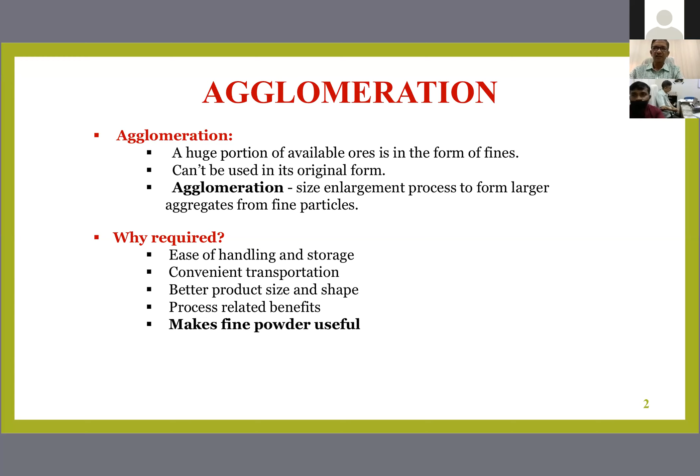There are two processes normally practiced, although there are many, like briquetting, which was the first among the agglomeration processes used, followed by nodulizing. These two processes slowly started going away from the scene because they cannot be manufactured on a much larger scale. As the volume of fines started increasing, the briquetting press or nodulizing units were not able to handle the capacities we were looking for.

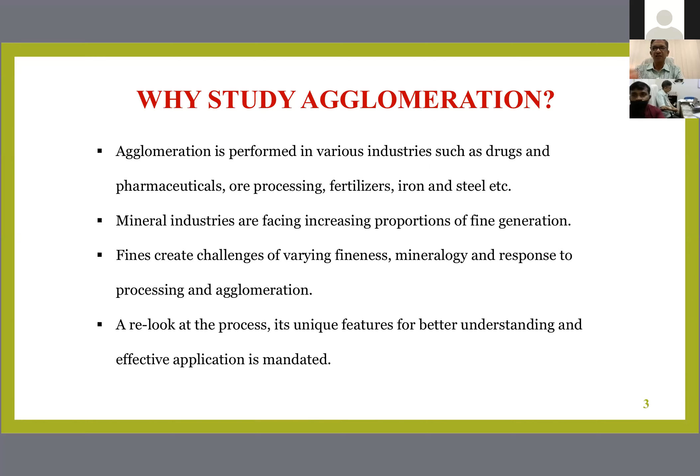So the two processes which at the moment are universally used across the globe are sintering and pelletization. Sintering is a process where you heat it to just below the fusion or melting temperature, and the incipient fusion on the surface of the particles binds them together, producing a sinter.

The difficulty or limitation of a sinter is that the shape is irregular. You need to break them at some point to send it to a blast furnace operation. The permeability that a sinter makes may not be completely conducive to the heat reactions that you need to undergo in the blast furnace.

Pelletization gives the advantage of producing relatively more regular shaped materials, pellets, which are more spherical and create very good porosity and permeability of the bed so that reactions are much better. But the blast furnace feed mix will have to be lump, sinter, and pellets. Earlier it was only lump and sinters; now a little part of pellets are also being used.

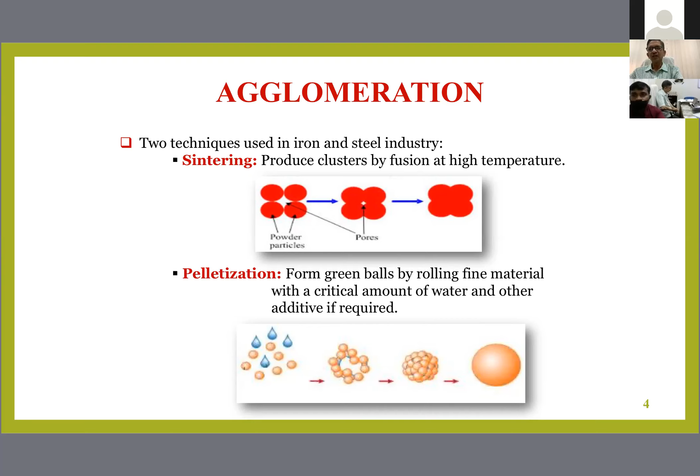In my opinion, with the kind of beneficiation processes and the ore that we are mining, the size of liberation will keep going down and down. Then there will be more and more requirement for pellets to be in the blast furnace feed mix.

Once we know that pelletization has already come to the fore and will be leading the next few decades, I have a personal feeling that the pellet proportion will increase, with lump and sinters relatively decreasing, making it maybe another 50% or something.

The pelletization process is carried out in two major events. One is to prepare a pellet which is wet and green, of some size and strength. Later on, you remove the moisture by preheating, then dry it, and then take it to induration before the pellet is ready for being fed to the blast furnace operation.

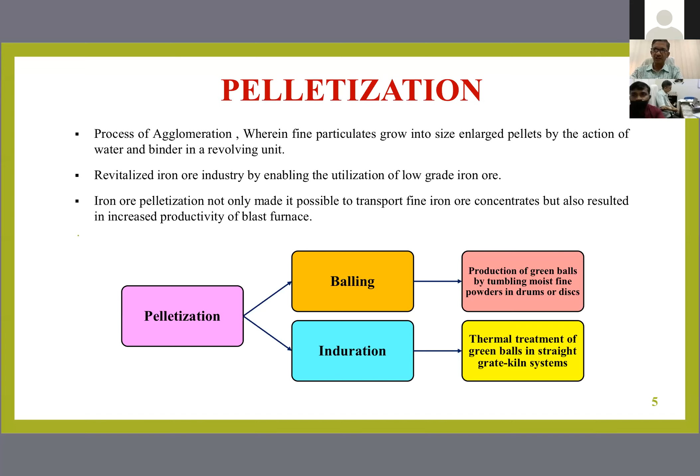So green pelletization is the first part, followed by preheating and drying, and then you move to the induration stage. The production of green balls of a particular size, range, and strength is of critical importance, because once your green pellets are of proper size and strength, that leads to a much better indurated pellet in the end. So if I do not have a good vocabulary, I will not be able to make a good sentence.

Taking the analogy, the green pellets are to be of sufficient size, range, and strength to be amenable for proper induration, and that should provide good blast furnace feed material of sufficient permeability, so that the blast furnace process efficiency is better. So the first and most crucial step is the green pelletization.

To all my young friends listening to me, when I started the research on green pelletization, which was my PhD topic in 1981, about four decades back, people were saying why pelletization? Because pelletization had been stopped due to higher cost of fuels in induration. So pelletization has no place, no future. Why have you taken a PhD topic of this nature?

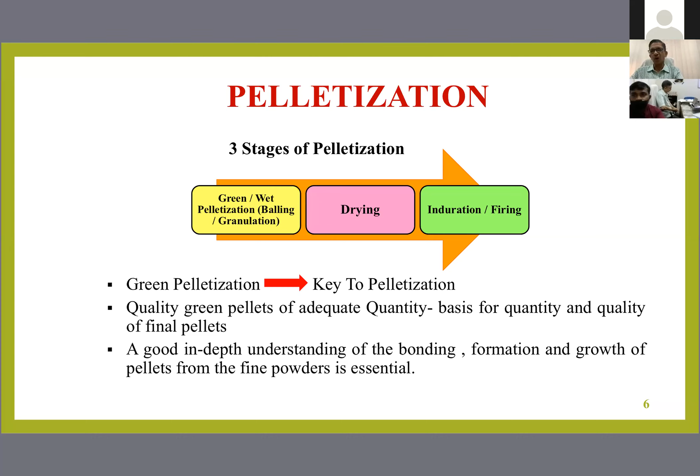So let us now take a fundamental look, which is what I tried to understand in the beginning when I started my career: why a pellet becomes a spherical particle, and how this process goes on before I get a pellet of a spherical shape.

Each and every particle, according to its surface area, will have its own surface energy, which could be electrostatic, magnetic, or dielectric properties, and they do have a tendency to attract each other. So that will be in a dry state.

But when I add a liquid, the particles and the liquid start interacting. Then as water is trapped between two particles and starts becoming thinner and thinner, the particles start becoming closer to each other. As the interfacial area between the two keeps coming down, the surface free energy that was there keeps reducing too. So the key driving force in the green pelletization process is the shrinking of the interfacial area, which brings the particles together, and then the mechanical action of the rotating device, disc or drum, gives it the final shape.

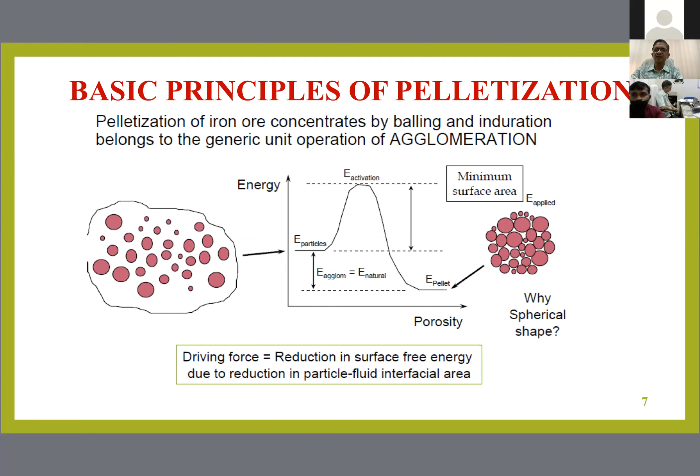So it is a very good individual microporous structure, and the pellet will totally have good permeability there, because a three-phase system is reduced into a two-phase system. And this is common knowledge.

Or it can be a pre-moistened material coming to a pelletizer. Then you add the requisite amount of water in a manner that it is equitably distributed, so that all the particles have a very good chance of taking the water molecules, and then increase themselves into a size which can be recovered from the disc pelletizer or the drum pelletizer.

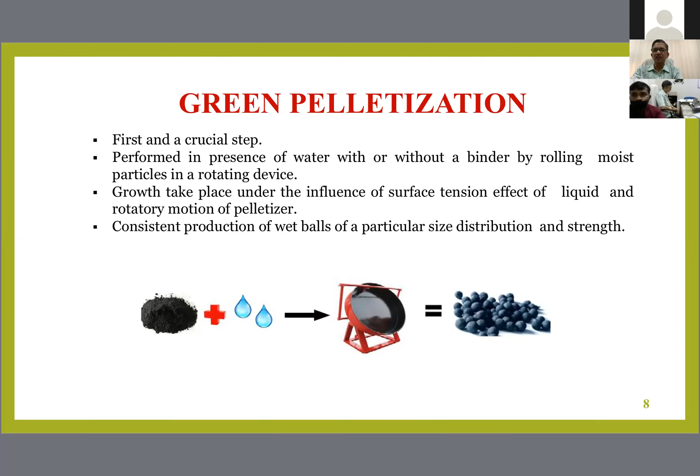So a consistent quantity of pellets of sufficient size range, that is 8 to 16 millimeters, is what is normally required, and of sufficient strength, both green compression strength and drop number, will lead to a good drying stage, followed by a good induration stage.

So I have just listed the natural forces that make the particles come together and enable size enlargement. The first is the van der Waals forces, the magnetic and electrical properties, mostly of relevance to a dry state.

Then the second is the interfacial and capillary forces due to the action of the liquid, the surface tension of the liquid, and how it binds the particles together. So that is the force which brings the particles together.

The third is adhesional or cohesional forces, that is an enabler or additive, that is binders, which give that particular force of bonding together, so that it can increase the strength of the pellet. Then there are solid bridges formed by interlocking. I'm not concentrating on that because it is very minor when it comes to the pellet, but in sintering, there will be some amount of interlocking effort.

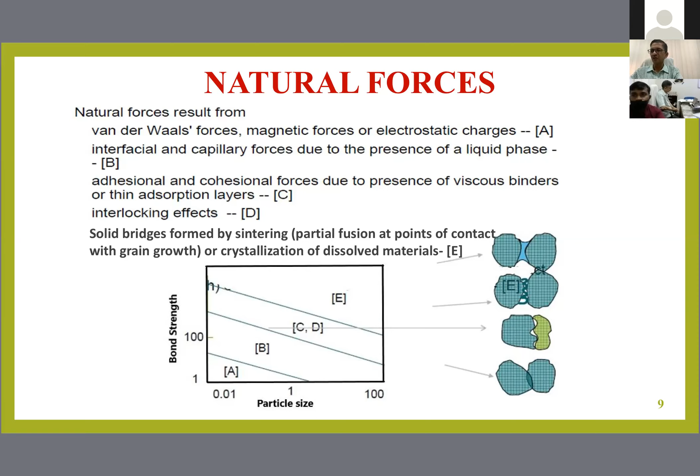So I would say B and C are the two major forces where the fine particulates become a green pellet. As I was trying to highlight, it is the interaction between the solid particles and water that really brings them together in the initial stages.

There's great contribution from researchers like Rumpf, Fisher, and Hains, where they tried to find out how the three-phase system - solid, water, and air - over a period of rolling or mixing, becomes a two-phase system. It goes through stages, like a pendular stage, where you have water in the form of droplets, more air pockets, and solids. The minimum amount of water holds the particles together, so the pendular bridges will be relatively weaker compared to the capillary state material.

Then when the mechanical force or applied force starts lengthening the water droplet, the droplet starts becoming a lens. As it elongates, moving through the interstitial spaces between particles, it slowly drives out the air from the system and occupies the vacuum created by the removal of air.

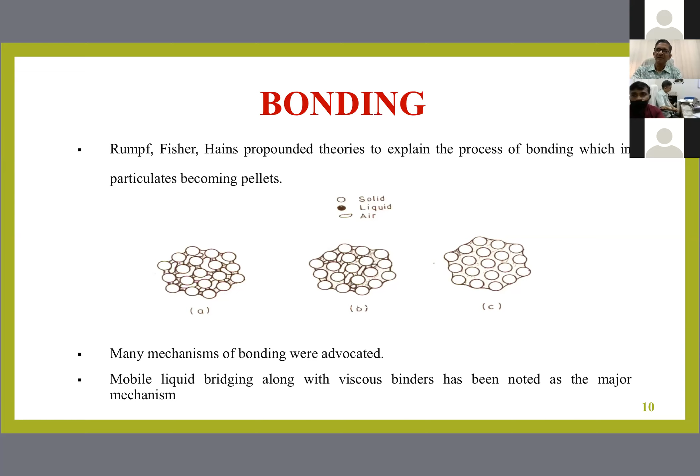This again is a force balancing phenomenon. The contribution of Hains is that he derived a function called suction potential - if there are two particles of particular surface energy, and liquid holds them together in the form of a droplet when we spray moisture, the dry particles attach to the droplets, the droplet becomes a lens, and the lens becomes elongated material flowing through the capillary pipe. The thinner the water becomes, the better the attachment between the particles.

So you see going out, that is the expulsion rate of the air, and once that expulsion rate is there, that will be the rate at which the water will become thinner and thinner. And the critical surfaces are under compression. So the negative effect of compression of the solid surface and the removal of water, exudation of water, and the air and water are the two combined forces which bring the particles together.

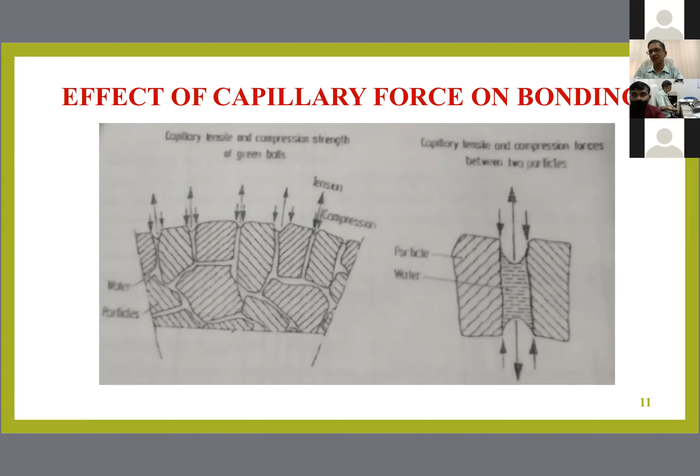So this particular graph or figure is what initially I had a lot of difficulty understanding. But once it was understood, the external forces can be manipulated in such a way that this phenomena takes place as early and as quickly as possible.

So this is again a pictorial representation of what I told already. In the beginning you look at two particles, then they start pointing together. Then the moisture that keeps coming to the surface keeps dragging more and more dry particles into it. As more and more particles are there, the water in the interstitial spaces starts moving out. Then finally we end up with all the pores filled with water, with a thickness of water on the surface. And then the nuclei has been arrived at.

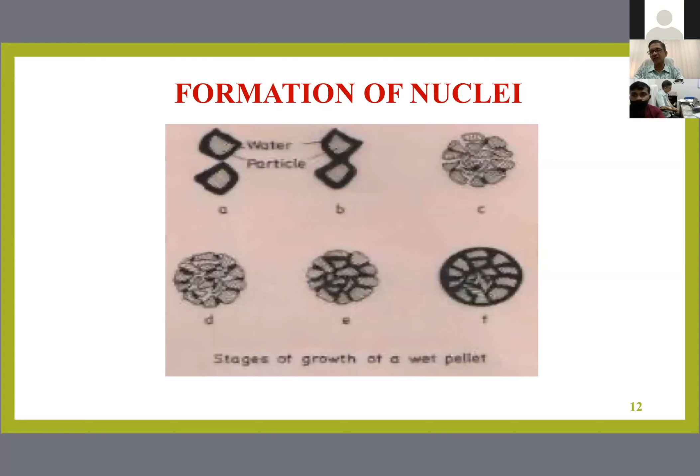So this nuclei formation - industrial practices should make it happen as quickly as possible. For that, you need to understand the size distribution of the material being treated, what quantity of moisture needs to be added, and more importantly, how and where this moisture is added in the pelletizer. That's what I'll come to when I start talking about the factors affecting pelletization.

Now, in summation, these are the major activities. You have nuclei formation, and then the nuclei start colliding with each other, and because of the surface moisture, they stick to each other. The number of nuclei keep sticking to each other, so that slightly increases in size, and the process of nuclei joining together to become a bigger entity is what we call coalescence - that means the coming together of moist fragments, or moist micropellets. So this activity is the first step in the growth process.

Then the mechanical forces - sometimes what is the binding force of the pellet, and what is the speed of the disc or drum, and what is the inclination. These two, disc and drum speed and inclination, will generate a torque, and if that is more than the binding force of the pellet, then the pellet is likely to break when it hits the rim of the pelletizer. So there is a lot of material which may form into a coalesced material and break, and then the broken fragments again stick onto the surviving smaller entities.

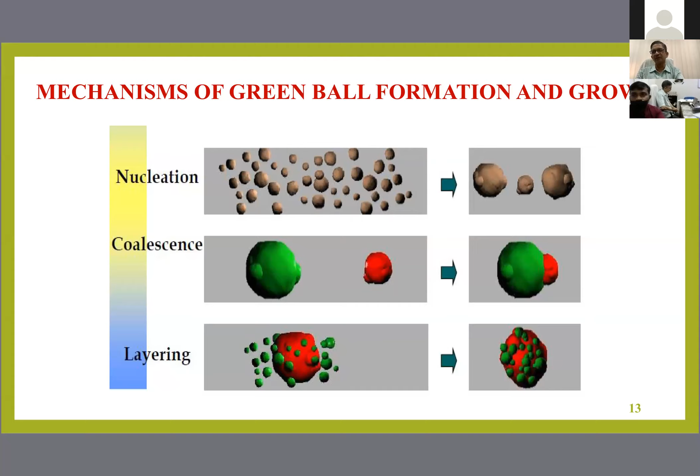This is a macro imaging of the process, and there are a lot of micro events that take place before the final layered pellets, which is above 8 or 9 millimeter and can go out of the pelletizer, start arriving.

This particular graph, in 1964, when Professor P.C. Kapur of IIT Kanpur, at the University of Berkeley, started doing PhD on pelletization, came out with this landmark graph. Why I am saying it is landmark is because this is the fundamental understanding of a pelletization process, especially the balling process, that one has to understand.

Then if these regions are manipulated - he has taken the number of drum revolutions on the x-axis and then the average pellet diameter - so as I was trying to say, the nuclei growth region has to be as small as possible, and the transition zone relatively greater, but the ball growth region has to be much more.

So the sooner we arrive at that ball growth region, that means the pellets have to increase from somewhere around 6, 7, 8 millimeter to 10, 12 millimeter and beyond. So the sooner we reach almost all the material at a pellet size of 7, 8 millimeter, that is what we call the ball growth region.

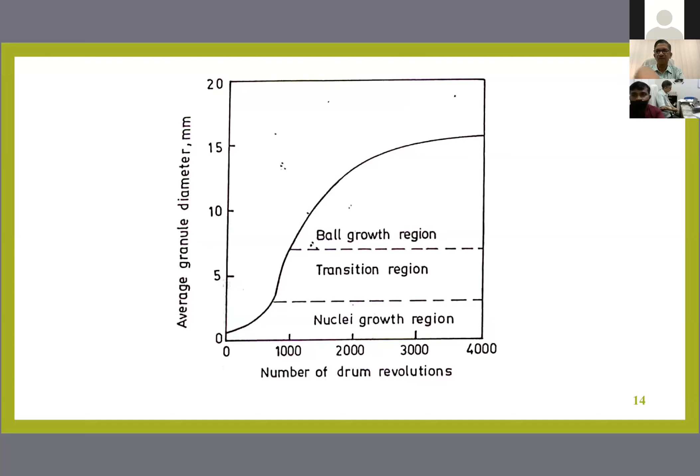Now Capes is another scientist who contributed significantly - two people, Capes and Danckwerts. They were the ones who initially started modeling along with Professor P.C. Kapur, and started giving a quantitative analysis of the processes of nucleation, coalescence, crushing and layering when it comes to batch, and also layering when it comes to a continuous process.

But in my opinion, the modeling of the nuclei was included as part of the coalescence modeling, which I later on understood when I started studying pelletization. I think a good quantitative understanding of the nucleation process is key - if I have to get more pellets in less time, the production rate has to be increased. But Capes gave us three mechanisms.

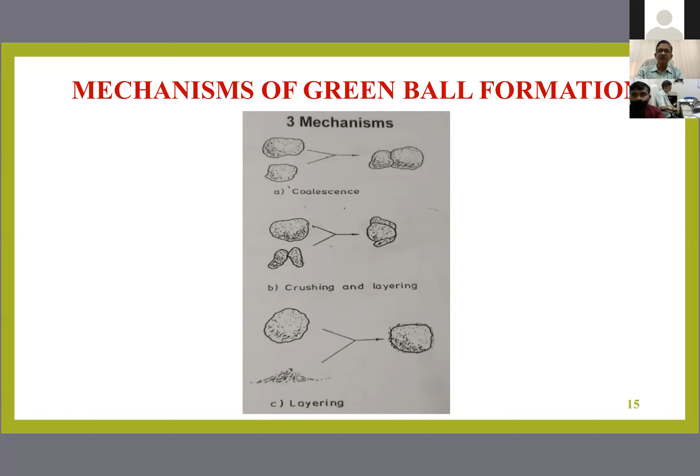One is to form nuclei, and they combine together. Second is coalescence, crushing, layering, and finally the fine powder layers onto that - which Professor Sastry later on, when trying to use mathematical modeling of the green pelletization process, used the population balance methodology, where he said yes, the nuclei coming is the birth, then the nuclei mix and interact together to become a coalesced pellet.

That again is a birth. And a coalesced pellet at some point of time breaks, so that is a death. So the population keeps changing as a function of time, as a function of drum revolutions or disk revolutions. And then he started breaking down the events into micro events - nucleation, attaching together, crushing, breaking, then abrasion, accretion, abrasion transfer.

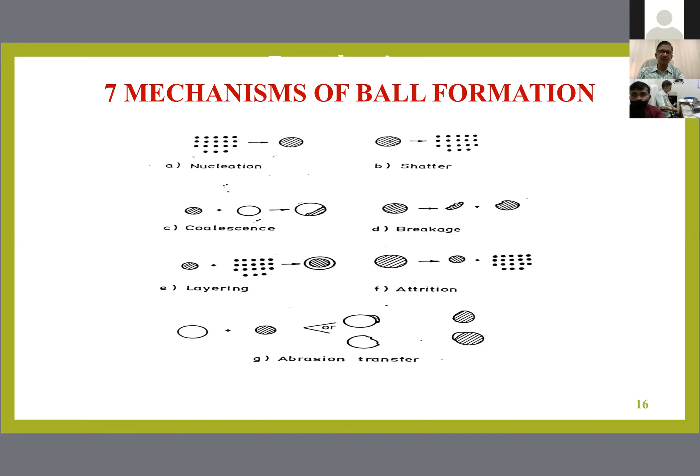Once we want to mathematically express this, we can assume a number of events and give a pictorial representation of a mathematical expression. But to be succinct, it is always better to have only three processes when you do a batch green pelletization in the laboratory or initial testing at the pilot scale. When we go to the continuous process, we have a fourth process of layering or snowballing. We will come to that.

So the rate between these 4 mechanisms are the ones that we need to reduce. And for that, we need to understand the material parameters, the machine parameters, and handle both judiciously to give a final pellet of a desired quality.

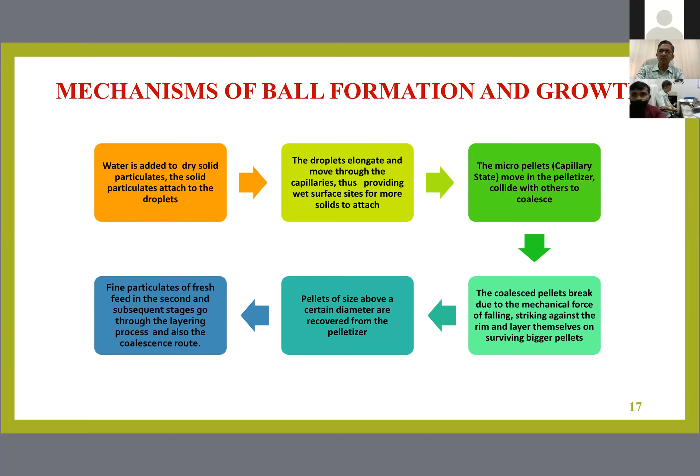So these 6 stages of ball formation and growth are what one has to understand with respect to the material I am going to pelletize, the kind of binder I am going to use, the water quantity and how I add it to the pelletizer, and how much binder I use. All these factors contribute to an early formation and healthy growth of the pellet in a short duration of time. This whole activity needs to be done with understanding of these factors which contribute to a pellet of a particular size distribution and strength.

You can see at the bottom and at the top, these two are the critical parameters - the initial feed size distribution is the starting point of pelletization, and the moisture that I add is a function of the size distribution of the feed I'm going to use. So the interaction between the quantity of water I add versus the size distribution of the feed material - these two create the nuclei and the capillary state pellet. The binder is an additive that supports the process of nuclei formation, because pellets made out of only water and solid particles are not strong enough to withstand the fall or impact. So binders are essentially added.

If I don't need to add a binder, I'll be more happy. So people are also trying to find out whether the feed material itself can be impregnated with a material which has inherent binding property, then I don't have to add any binder externally. These are all in the laboratory investigation stage, so when it will reach commercial stage we don't know. But if your feed material has a material with inherent binding property, you need to be very careful about the quantity of moisture that we add.

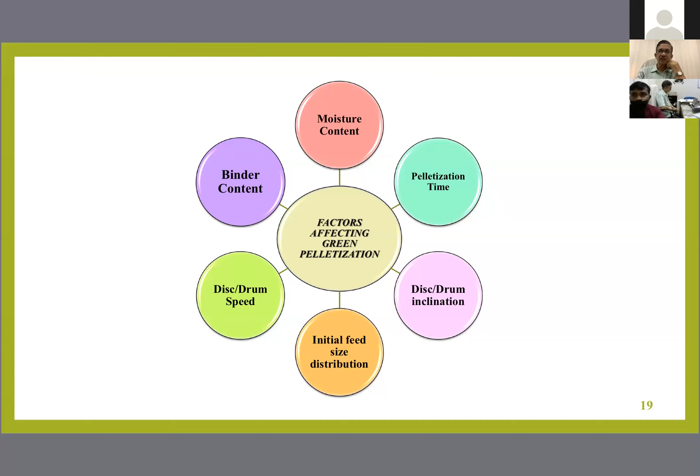So these can be controlled by speed and time. Speed, inclination, and time are the enablers - they give you a pellet of a particular size distribution and strength. And the prime movers for the pelletization, that is the green pellet production of both capacity and quality, will be the feed size distribution, moisture, and binder. If we understand these things, we can give the industry the result they require.

So these are all, again, what I have said. The pellet quality and quantity we find out in terms of size distribution, as a function of the average size distribution - because we can represent size distributions as coarse and narrow, coarse and wide, fine narrow, and fine wide. In a pelletization operation, we require a relatively coarser size but a wider size distribution. So the average size of the distribution tells me whether I have reached the pellet size distribution I'm trying to get out of the pelletizer.

Then when I screen the material from a drum pelletizer, or collect the classified pellets from a disc pelletizer, that tells me the weight proportion of material above a particular minimum size, like 8 or 9 millimeters. In my studies, I had taken 9 millimeters as the threshold limit - so what is the percentage of material above 9 millimeters?

Then we try to find the strength, both at industrial scale - the weighted mean drop number and the compression strength - so that when it is transported or falls from a given height, it doesn't crumble. When more pellets travel on a conveyor belt, the pellets above apply pressure loading, and that should not make the particles below crumble. The pellets at the bottom should withstand the pressure exerted by the pellets on top during transport. So these are the four parameters of quality and quantity we normally need to estimate for a green pellet.

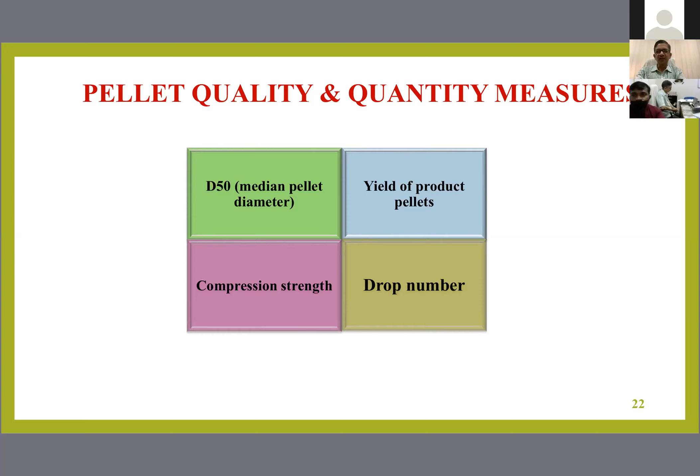Then how do we calculate the D50 average size? It could be a simple graph drawn of cumulative percent passing against the size. When I draw a line at 50% passing, the size of the material at that point means it is equally distributed, plus and minus. So that gives me the average size, and an idea about the coarseness or fineness of the material.

Why this D50 is important will come later, because in modeling, in most cases you can't take the entire size distribution into consideration. You need a representative size of the distribution which indicates whether your material is coarser or finer. So some people call it the median pellet diameter, which is D50.

Sometimes you can even take the 80% passing size as the representative material. That is what comes when you go for a blaine number. When you grind the material and take it for surface area measurement, whatever number comes, you take it as the blaine number, which gives an indication of the fineness or coarseness of the material.

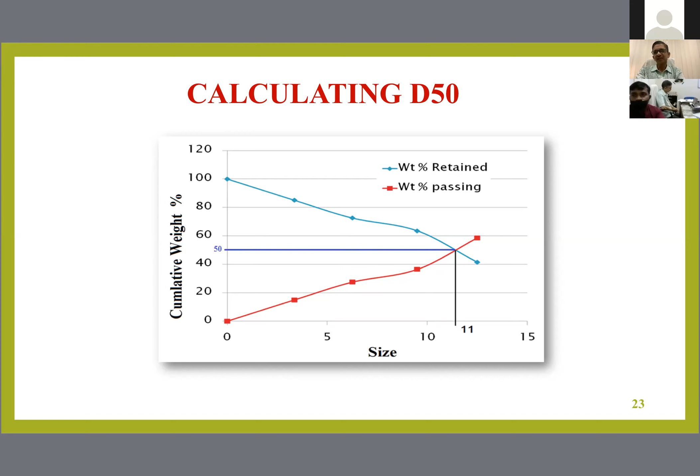So there were qualitative experiments carried out. Then based on the range of operating parameters, more rigorous statistical analysis was carried out, with F-test and ANOVA. And then finally we arranged the variables in order of significance.

But this was done during the 80s, only for research purpose. Later on, as more material systems were studied for green pelletization under my guidance with more students coming into the stream, we found that this kind of pattern, this order of significance, is prevalent in most of the material systems.

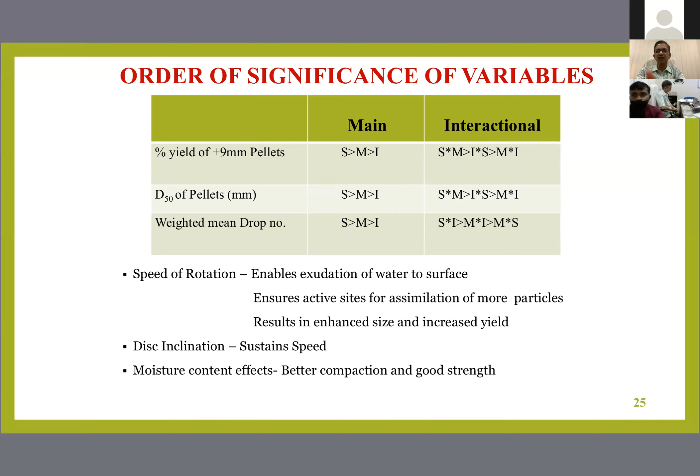So that is why this kind of chart being prepared is very, very important once we go for better control on the pelletization operation.

Okay, so whatever I told until now is what people understood qualitatively, and how that qualitative knowledge was converted to a quantitative device, algorithms, and how they were made use of in understanding and solving problems of the industry.

So there are many ways in which you can do the modeling. But the most important thing people have done is, initially, people worked on nucleation, capillary forces, and different forces, which was theoretical - more phenomenological. Then the kinetic approach was the one that was initially used, from the 1960s to maybe the end of the 90s or beginning of 2000, 2005 and so on.

But then people started understanding that the population balance approach, compared to the kinetic approach, is much better because of some shortcomings of the models developed using the kinetic, theoretical, and empirical approaches. Most people are now comfortable with an empirical one, where it doesn't bother about what happens inside the pelletizer, but finally says that if these are the parameters you use, you will get a pellet of these characteristics. So the response surface is what people have been trying to use more.

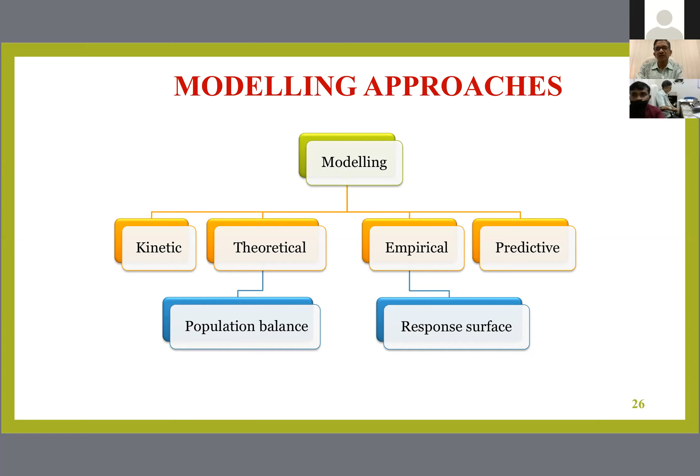So these are all just small extensions of what I explained. What is the growth of pellet in terms of number or size as a function of time is what people started doing in the initial part. Then the order kinetics, whether it is first order growth or second order growth, was done by a very limited number of people.

This is also an important thing that needs to be done at the industrial scale operation, because the rate at which particles become nuclei, nuclei become coalescence, and coalescence becomes the final pellet, is what needs to be understood in order to control the pelletization process. So we should know whether it is fast kinetics or slower kinetics.

The growth takes more or less time. As I told, if the material has more inherent water absorbing capacity, the kinetics will be slower. But if it is a dry material with not much inherent moisture, the external moisture is able to do the job and the rate of growth is faster. So the order of kinetics needs to be understood depending on the material we are using. If it is goethite rich, we need to care for the quantity of moisture we add, and understand what residence time the material should be given to become a pellet of this size.

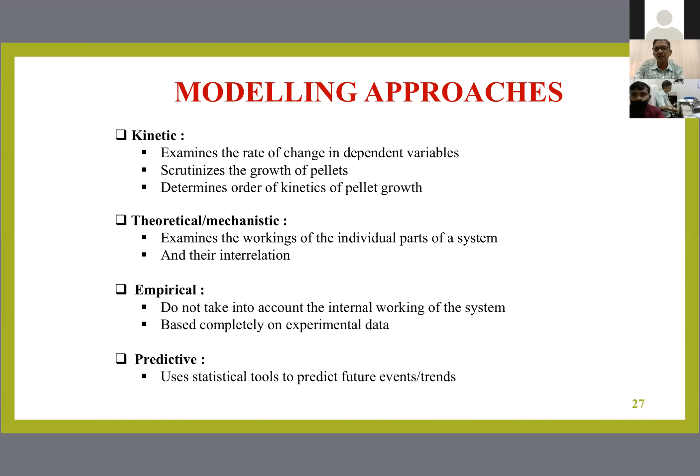Then there were theoretical models, empirical models, predictive models, and population balance models. This is where Professor Sastry contributed to a great extent. There are some size ranges or numbers that are born, and some sizes and numbers disappear. So the appearance and disappearance kinetics as a function of the operating parameters is what was involved in this population balancing.

So I want a population of this nature finally. This is the population I start with. Then what is the birth and death, or appearance and disappearance kinetics, that takes place inside the pelletizer? If I understand this, I can have a relationship between the feed size distribution and the product size distribution. People say the initial feed size distribution is directly proportional to the final pellet size distribution I will get.

If you start with a 45 micron material as the average feed size, you can get up to 13 or 14 millimeter pellets, but the quantity of pellets at 15, 16, 17, 18 millimeters will not be much, because your initial size is much finer. If it is 75 micron, you can even get 16 millimeter. But if it is relatively coarser, like 150 micron, you may even get pellets of 18 millimeters. So the final pellet size distribution depends on the initial feed size distribution I start with.

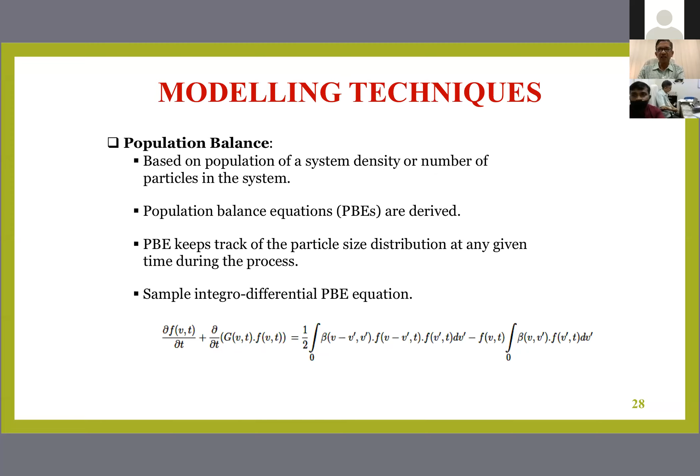This gives more consistent quantity of pellets of a desired size distribution and strength. So in the next few cases, I will be showing the equations and so on.

These kinetics of pellet growth are said to be pseudo first order or second order. That means most material systems are first order processes, or there is somewhere a transition between first and second order. We don't know, it could be 1.1, 1.2 or 1.3 order. But when you give more time to a material which is inherently moisture based, it moves up toward second order growth. So this is only an understanding of the material growth kinetics, which will dictate the residence time distribution of the material in the pelletizer.

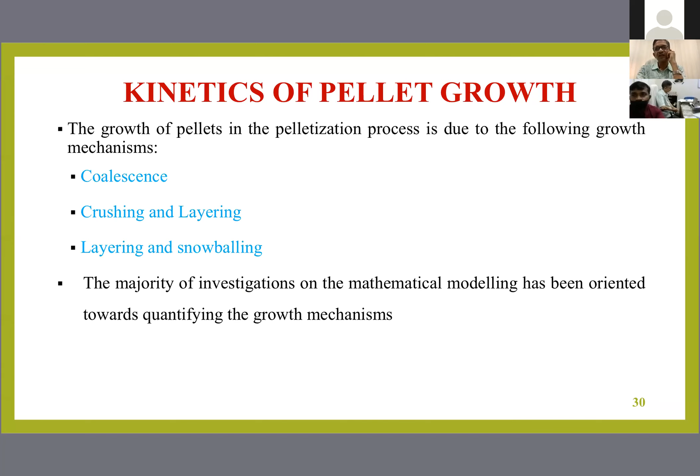All these equations are there with you. I will not go into much detail here, but what is important is the thought process behind developing this fundamental. Initially, Professor Kapur, Professor Sastry and others took the number of pellets as a function of drum revolution, since they used a drum, not a disc. So as the drum revolves, what number of revolutions produces what number of pellets of a given size. The initial size was I, and the final size required was J. So how your Ni varies to Nj as a function of time. Initially, Professor Kapur took the specific surface for this much material in this size range.

That means that will give you a specific surface as a function of the number of drum revolutions. Then he elaborated that more with respect to the moisture content that we are adding, and how moisture influences the specific surface of the pellet as a function of the number of revolutions, or you can even convert that into time. Number of drum revolutions can be even residence time of the material. So use a number of revolutions or the time, and then find out the rate of change of number or size of pellet as a function of the moisture content that you have added.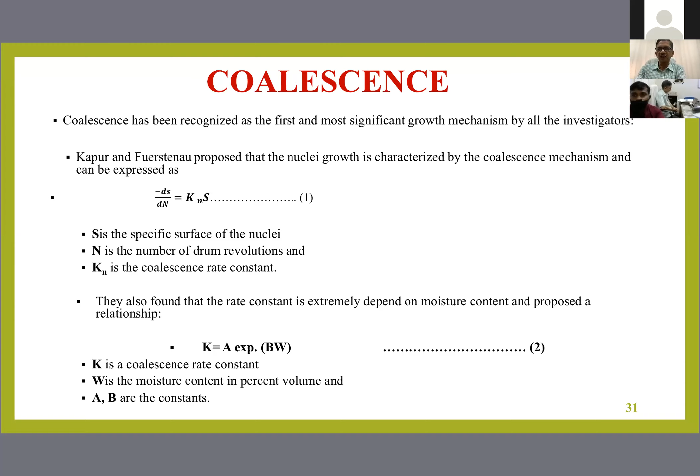Then another next approach was whether this coalescence is random or non-random. And that is where a lot of debates went on. If you can see those literatures around the time, 60s to 70s, there were a lot of models developed, papers published where some people said the coalescence is random, and some people said it is random and fixed. Then some people said it is random but time variant. Then some people said it is non-random. But as far as my knowledge and understanding is that it all depends on the kind of material that you are treating. But fixed random has its own limitations, which I have mentioned in the end there.

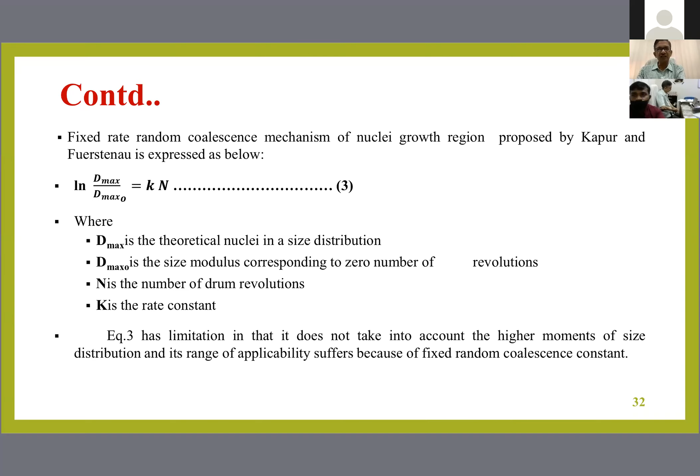Because it doesn't take the higher moments of the material growth. It has taken a theoretical maximum of the pellet size at the zero revolution, that means initial feed size. It is not taking any cognizance of the variations in the intermediate stages, time intervals, and also you will not be operating a pelletizer infinite time. Up to a particular time, when the material has to leave the pelletizer, at that particular time, what will be your size of the material, or what will be the number of pellets of a given size? That particular aspect is not covered in the equations that Professor Kapur developed.

Then the phenomenological model came where Sastry combined the approach adopted by Professor Kapur, and Professor Sastry is a student of Professor Kapur. So he carried forward the work of Professor Kapur under the guidance of Dr. Fuerstenau. So they all gave more kinetic equations as a function of time or the number of revolutions of drum, how the pellets vary in their numbers and size, and defined the coalescence rate. So this is the time by which the rate at which the nuclei will become a coalesced pellet.

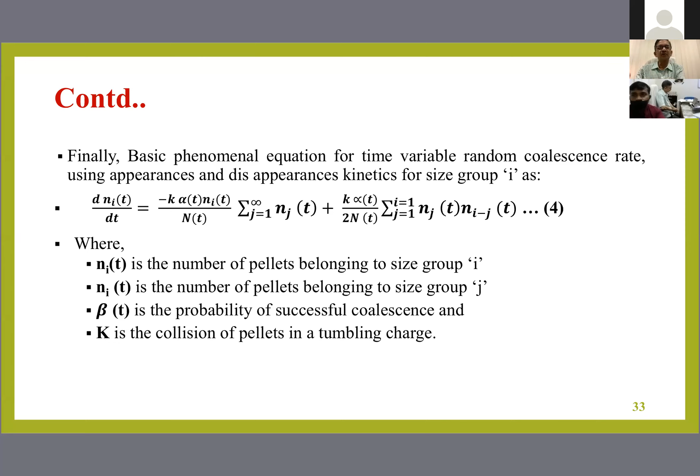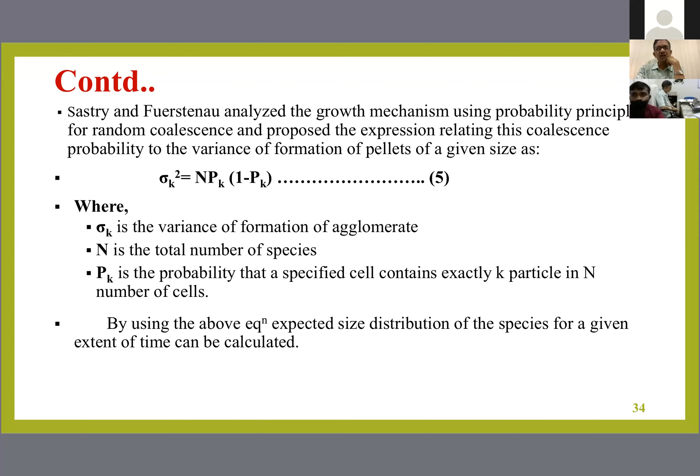Then probability approach, a factor of probability of how much probability for coalescence, how much probability for crushing and layering, and how these are interrelated to give the variability of the pellet size distribution that we finally get. So the variance of the pellet size distribution at the end will be a function of the initial pellet size distribution and the changes that take place in the time intervals before a pellet is taken out of the pelletizer. So all these approaches gave us a very good understanding about the coalescence process.

And Capes and Danckwerts contributed significantly in explaining how much of the material which has become a coalesced pellet is likely to crumble, and then how that will be distributed over. The debate went on: is it the relatively coarser coalesced pellet that breaks, or it is the finer coalesced pellet? Then which material layers on which material? Whether a coarser material layers on the finer, that means it assimilates, gobbles up the finer material, or it is the finer fragments that go and stick onto the surviving relatively coarser material. So this crushing, how does it take place, and how the layering takes place before my final pellet size distribution is arrived at. Many people were not clear during that time.

The contribution of Capes and Danckwerts is that he took three sizes: the initial size, that is D0. Then he took the maximum pellet, that means at the end of the pelletization process. Then he took a median pellet diameter. So he says, if I can understand from beginning to median, then more or less that will be the rate at which the pellets will be forming. After that, there is a probability of the material breaking. That means there is a pellet size up to which no crushing takes place. So one has to determine that size. For example, if a 4 millimeter nuclei is there, that can go up to 6 or 6.5, 7 millimeters. Till such time it will not break.

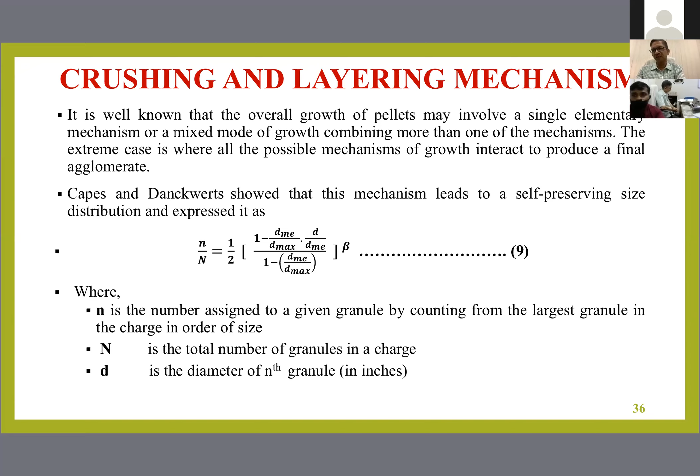Look at the theoretical aspects we initially discussed about natural force and applied force, and how the dry material becomes a nuclei, and what is the kinetics or quantitative analysis of the coalescence process, crushing, and layering process. So in the batch also this will be useful, and in the industrial scale operation, the ball growth region is what will give you that kind of consistency. So qualitatively, one has to understand this, and for a given material system, quantitatively you need to develop a similar graph for the material system we are handling. Then we will be able to understand how these zones or regions vary with respect to the operating parameters.

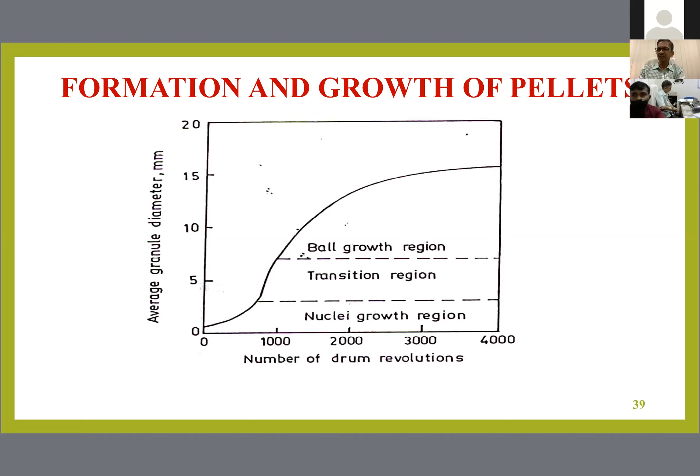So, okay, this again I will rush through because I don't know how much time I have. How much time is there? Okay. Am I audible? I am able to.

So the predictive modeling is what Professor Sastry did, where you could put a probability function for pelletization, like coalescence and crushing layering. Then they could predict the size distribution, but that prediction of the pellet size distribution was at the batch scale, not at the industrial scale.

But then in modeling and understanding a process, we can borrow a lot of ideas from different places. Like this approach is normally done in hydrocyclone classification operation in mineral engineering, where as a function of the operating parameters, you keep plotting.

And then when you make your x-axis a dimensionless axis, that means - I told you how to find out the D50 - so for example, if I change the moisture from 10, 10.5 and 11%, then at 10% moisture I'll get a size distribution, at 10.5 another, and at 11 another. So plot all three size distributions and find out the D50. So I have now D50 for 10% moisture, D50 for 10.5, D50 for 11%.

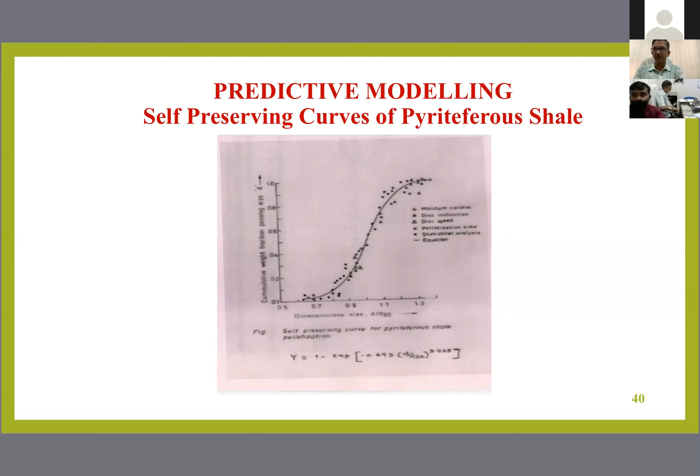Then this kind of self-preserving curve was prepared for pyriteferous shale. You can see the shape of the curve indicates whether it will give you a wider size distribution of pellet or less. Here there is not much variation in the quantity of metal and the pellet size distribution, whereas this could give you a relatively coarser but wider size distribution.

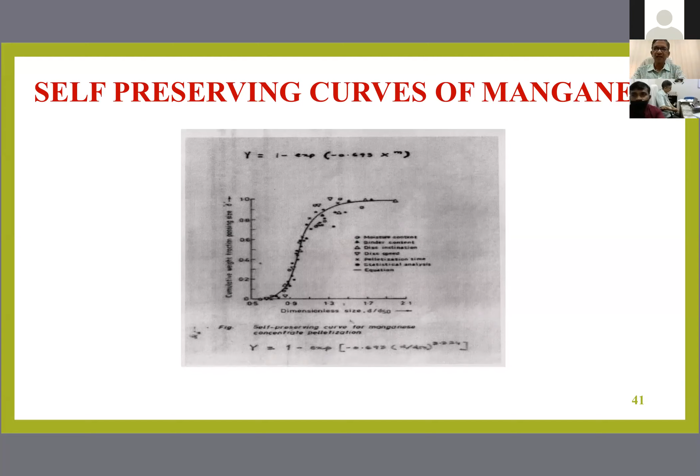And then you have an equation of this nature where y is equal to 1 minus exponential of minus 0.693 times d by d50 to the power m. So once you know this relationship between the cumulative percentage passing, that will give you an idea about the yield of pellet that you will get based on the operating parameters.

Then we need to develop a correlation between the D50 and the different variables or parameters that we changed. So once you get the D50 like that, this is again characteristic of the operating condition. But the curve that was drawn is a characteristic of the size distribution and yield of material I will get as a function of the operating parameter.

Now for a new set of experiments, all I need to do is change the value of moisture, inclination, or binder, then I'll get what the D50 will be. Then use this D50 in the self-preserving curve equation, and that will give me the cumulative percentage passing, that is the Y value. From there, I can calculate what will be my yield of pellets above a particular size.

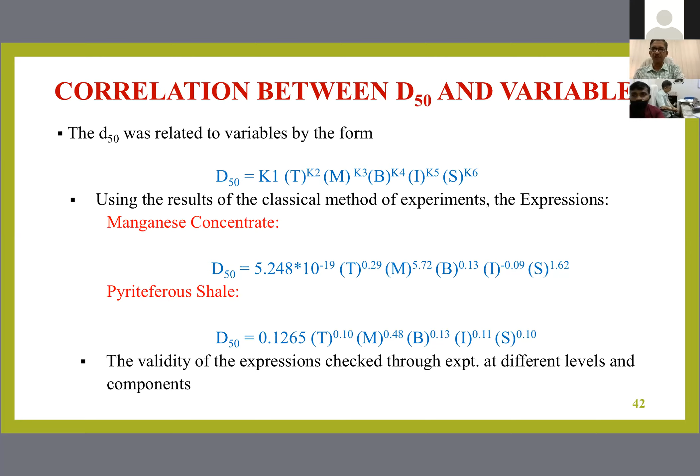So this approach was used in modeling. This was my PhD work. And this can be easily translated into an industrial scale operation.

All we need to do is, at the industrial scale operation, observe the cyclic variation that takes place in the pellet quality and quantity as a function of the operating parameters. Then develop these curves, which now the model itself can do. Your computer programs can develop those self-preserving curves.

And from there, they will be able to tell you, if this is the operating condition and suddenly the moisture has gone down, how your yield will be affected. If your bentonite content has gone down or gone up. So this kind of predicting the variation in your pellet size distribution can also be extended to the strength of the pellets.

So once these kind of model equations are there and computer programming has been done, if you keep feeding continuous data regularly, it can tell you the fluctuations that took place in the product quality and quantity throughout that shift of 8 hours, or whatever is the duration of the pelletization period.

So these kind of predictive models, which were done at the laboratory scale or batch modeling, have been scaled up and then effectively utilized in controlling the fluctuations in industrial scale operations.

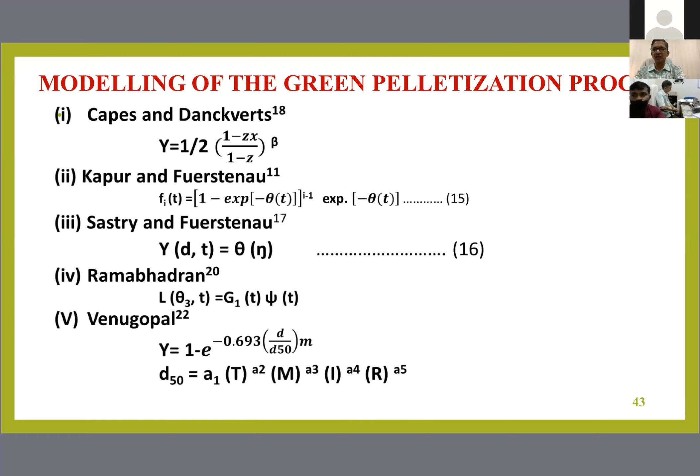So all this modeling was quantitative analysis of the qualitative understanding of the fundamentals of green pelletization.

Now, we quickly realize the pioneers keep getting obsolete easily. Like whatever approach Professor Kapur used, Professor Sastry improved upon it. Then what he did, somebody else improved further. The process of improving the understanding and expressing the process keeps improving with more and more tools available to us.

Here are some of the reasons why one has to go for the new tools of soft computing techniques, because many of the deficiencies or inadequacies of the models are that, as I said, a white box model is what we want, but we always have a black box or a gray box. Whether we use a kinetic model or a population balance model, a lot of assumptions are made which do not make much sense when it comes to industrial scale operation.

It is very difficult to determine some of the assumptions and parameters. So the approach available to us is either extrapolation or interpolation. If I had done only 4, 5, or 10 levels, the more parameter levels and parameters, the number of experiments keeps going up. Then it becomes very difficult for any researcher to take the entirety. A complex process cannot be explained simplistically by only a few parameter variations.

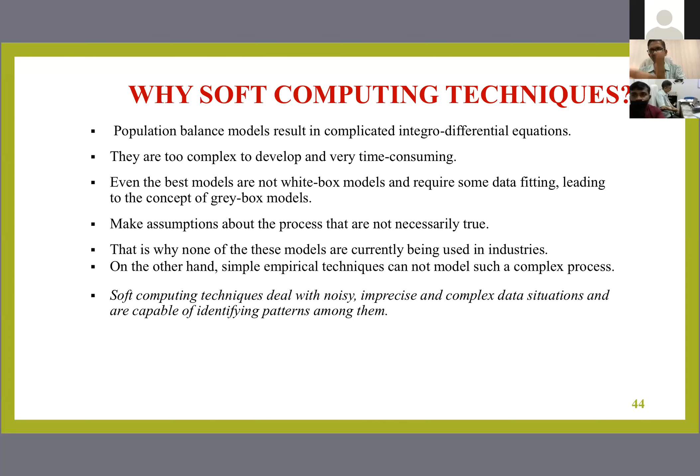Soft computing techniques are good in the sense that they can generate a lot of intermediate data on their own. Once we give the trend, trend analysis can be done by the soft computing techniques. Some of them that I have tried out include using a genetic algorithm for optimization.

You can go for different methods for different purposes. You can classify the material, meaning there is segregation taking place. Then you can approximate what will be your result of that - so classification, this one also. And then you have self-organizing maps. These are mostly useful for pictorial representation, where the color you see and the area that color covers will tell you that moisture has more influence. This one, the same thing we have converted, but unfortunately I don't have those self-organizing maps here, where the pictorial representation, the area covered by different colors representing moisture inclination, will tell you how D50 is influenced by moisture, how D50 is influenced by speed, etc.

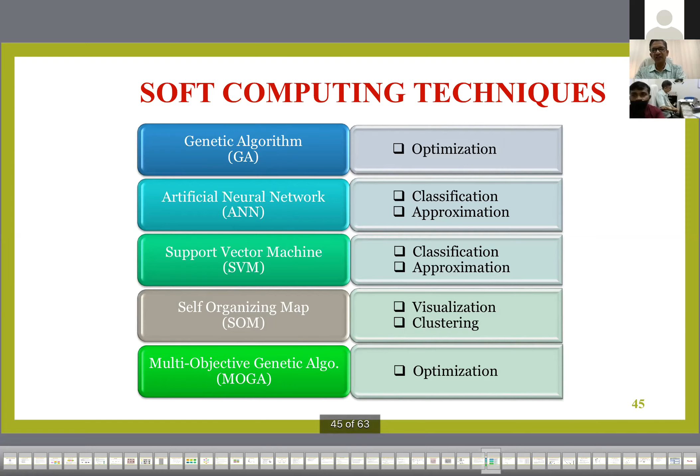So we used the multi-layer perceptron and support vector machine. We used the same batch data, used the genetic algorithm to generate - like I had only data for 27 experiments, 27 into 3 parameters, so something to the tune of 81 or something. Then we generated something like 400 to 500 intermediate data points through the genetic algorithm. So now I have the entire range of variation, the exact trend of the curve, of how pellet size or strength varies as a function of the operating parameters. Using that large number of data, which takes care of the chaos, the imprecise nature of the earlier models, we are able to understand the exact trend. And once that is there, the mathematical tools can analyze and give you the result they want.

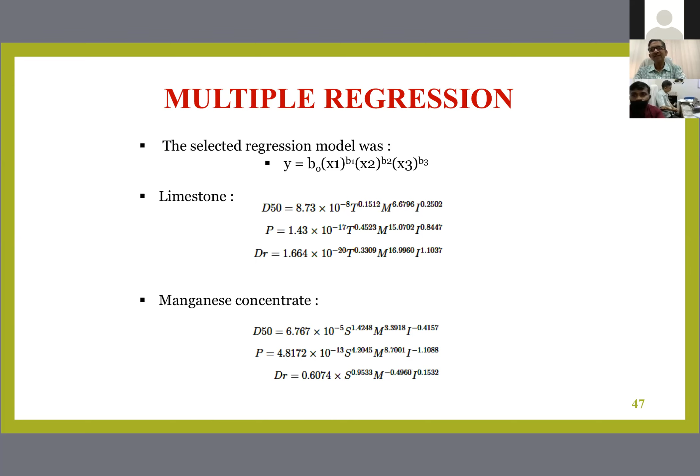This will skip here. These are all regression equations that were built and given to the multi-layer perceptron and the support vector machine from the basic data that was there earlier. And this is the kind of data that was generated, synthetic data. So like I had only 27, but then I could generate close to 300 to 400 micro-level data points that gave a clear trend of the effect of different parameters on the pellet parameters.

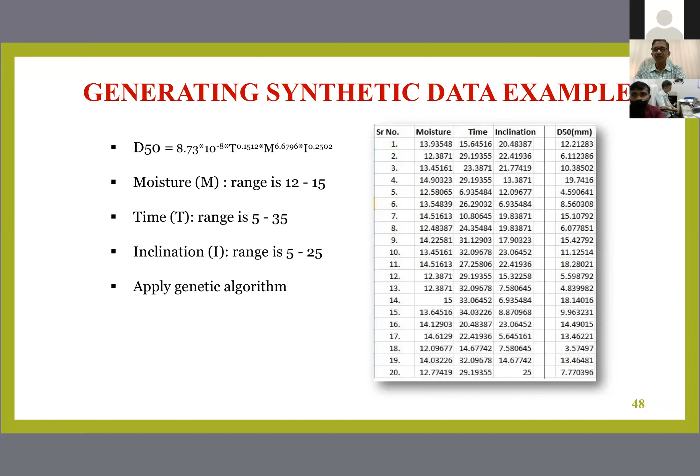And then that was used to predict the pellet, for a few experiments where the parameters were varied beyond whatever we had done. The multi-layer perceptron gave a much better predictive fit than the support vector machine, but that is only with respect to this material. In some other cases, your SVM can be better than MLP - it all depends on the material and the operation. Why I am saying this is the use of soft computing gave a better understanding of the variations that can take place in the pellet properties as a function of moisture, down to the minutest level of variation.

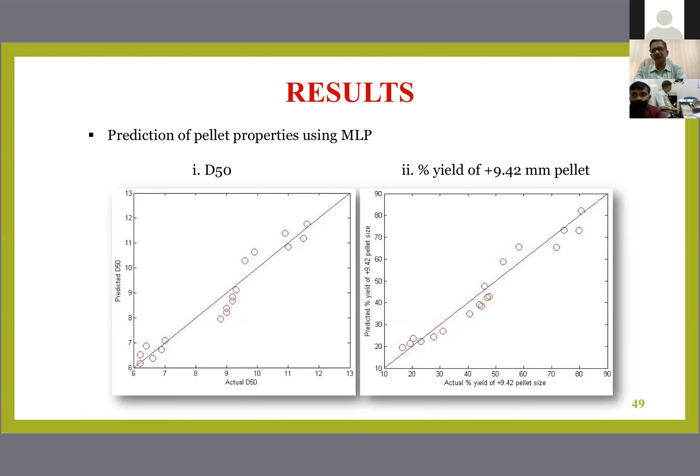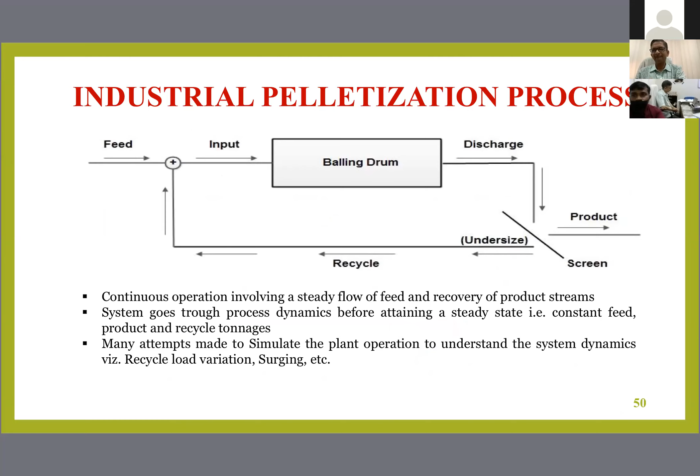But when we come to industrial scale operation, as I mentioned, we need to add a third component: the recycle. In the disc pelletizer, there is a variation in the agglomeration pattern - it is more like a spiral. In the bottom portion of the pelletizer, when dry material is there and moisture is added, nuclei and coalescence form, and pellets start forming at the bottom. Then the top layer, which is of smaller circumference, will have slightly bigger pellets, which could be coalesced pellets. Then there is some crumbling and rearrangement of pellet sizes. Once it reaches the top of the spiral, because of the inclination of the drum or disc, there is a natural classifying effect, and pellets above 9 millimeters automatically go out of the pelletizer.

This is the advantage of a disc pelletizer compared to a drum. In the drum, you need to have a screen to classify the material and then recycle. But still in disc pelletizer also people do that, because the pellets discharged from the disc cannot be so well controlled that some amount of finer material also can come with the discharged pellet.

But in drum pelletizer, you need to invariably have a classifying device, the screening device. So then it moves up and out, and once the pellet reaches the threshold limit, your inclination is set accordingly so that once it reaches the coarser size of 9 millimeter or whatever, it will go out on its own. So the disc pelletizer has a natural classifying effect, segregation effect of particles of different sizes from the bottom to the top of the rim. Once it reaches the rim height, it goes out.

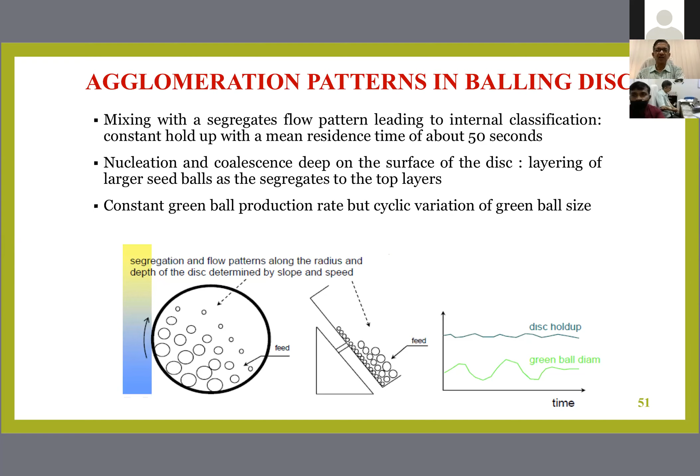Surging problems are not as much in a balling disc compared to a drum. In the drum, when the material comes back, the layering part and the nucleation happen at the beginning of the drum. Then across the drum, you get bigger pellets, and the final pellets are screened and recycled back.

So in an industrial scale operation, for it to reach a steady state, whatever is the feed rate or quantity, whatever is the product pellet quantity I am getting, and the recycle load, all these three have to be kept constant or within a range. Then we can say the system has reached steady state and my balling operation is under control. Any variation in these indicates there is a problem with the pelletizing operation.

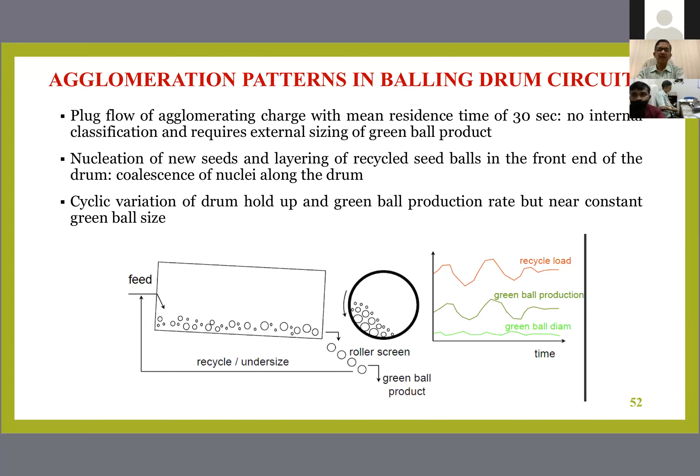So this is what we normally see, it takes a number of cycles before it starts reaching steady state, a consistency. This I am taking only with respect to product. You can see the product fluctuates over a range, over time. But how much time it will take before reaching steady state depends on your kinetics of pellet growth and so on.

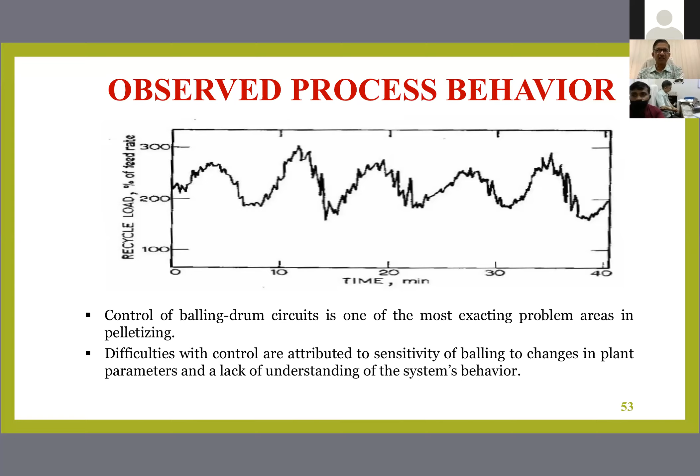But what we want is, as quickly as possible, this fluctuation should even out so that I start getting a consistent product and a consistent recycle load, so that my pelletizer is not surprised with either more material or is starved of material. Both excess and starvation are not good for a pelletizing operation.

So if I am doing a drum operation, then I need to control the initial stage where nucleation is taking place, that is the feed end, and the recycled material also coming there. So what is the quantity of recycled material coming and what is the initial feed size, that needs to be controlled for nuclei to form, and then it will give a consistent feed. These cyclic variations need to settle into steady state as quickly as possible, so I can control the process without much fluctuation.

These are possible only if we have understood the fundamentals, the impact of different parameters, and which parameters are critically important versus which are not that critical.

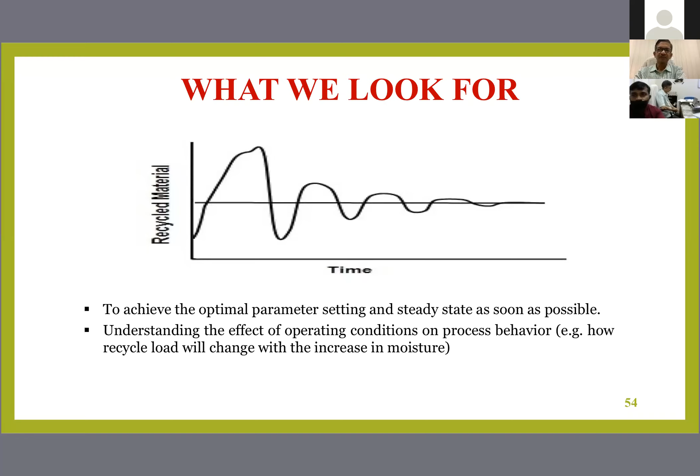Anything less than 9 is being recycled. Now, when the material of recycle load comes and you have a feed of 150 micron coming in, the question is how much of this minus 150 micron is layering onto the recycled pellets, or how much of that 150 micron feed is going through the nucleation coalescence process.

It will be very good if most of the 150 micron material I am adding layers onto the surviving recycled pellets, so they reach the final pellet size quickly. That is very good for the plant operator.

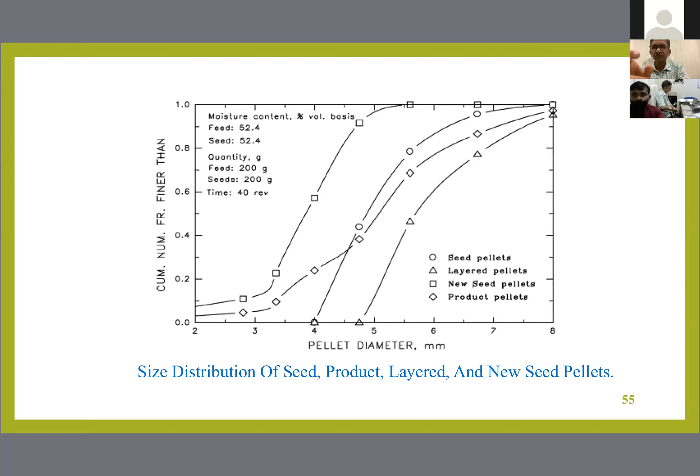Okay, so let me explain again. What we did was we went to a plant, sat down, then collected a lot of information.

Then we started using soft computing methods to generate these kinds of cyclic variations of the product and the recycle. We tried to find out that the product and recycle cyclic variation should be consistent. There should not be too many cycles, too much time required. So once it becomes steady, that means there are some n number of peaks before it becomes steady.

Then that should remain there. If both the recycle and the product can reach this kind of cyclic variation where after some time there is not much fluctuation, then the system is under control. So we did that kind of thing.

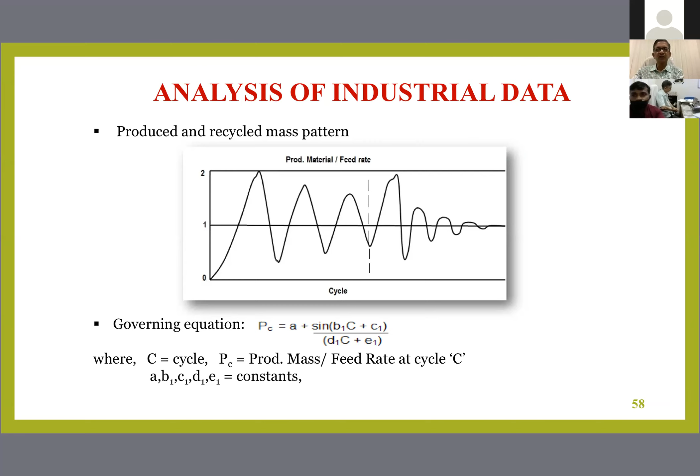Due to paucity of time, I'm going through this a little bit faster. For this slide, please go through it on your own.

This only tells you how you need to collect the data, how you should train your soft computing tool like MLP or SVM, then generate these cyclic variation patterns of the product and recycle. Then this can be built into a computer program and simulated.

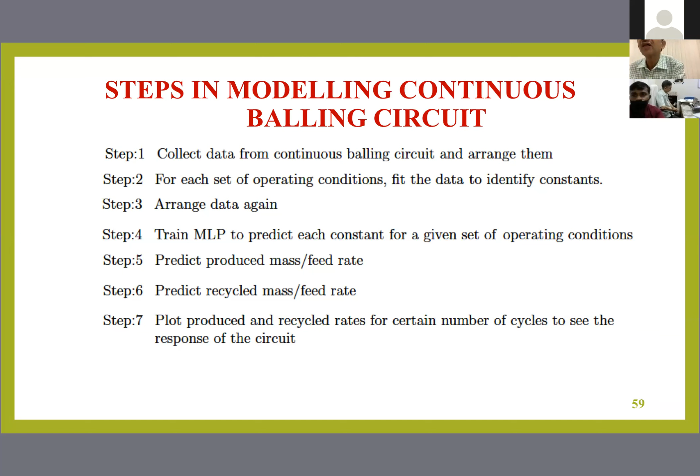I will just complete in a few minutes. Okay.

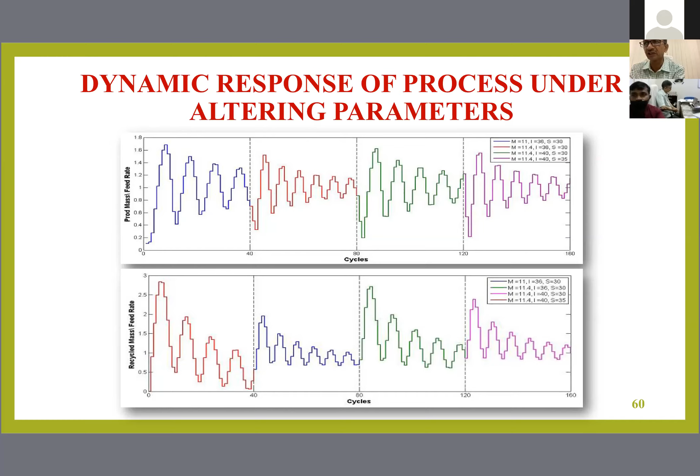Then we used a .NET simulation tool, a graphic user interface, and generated a final graphic user interface. There are many things set beforehand where the moment I keep feeding the data, the calculations start taking place.

Then this is the final one that will tell how the product is varying and how the recycle is varying. So once we know what should be the optimum, the ideal, if we can get as close a cyclic variation to that and maintain it, then we have handled the industrial scale operation very well. I have tried to put all the knowledge I have gained over four decades, both on the fundamentals and the industrial practices, into this.

To give the listener an idea about how R&D can be scaled up to control industrial scale operation more effectively and more productively. Thanks for your kind listening.